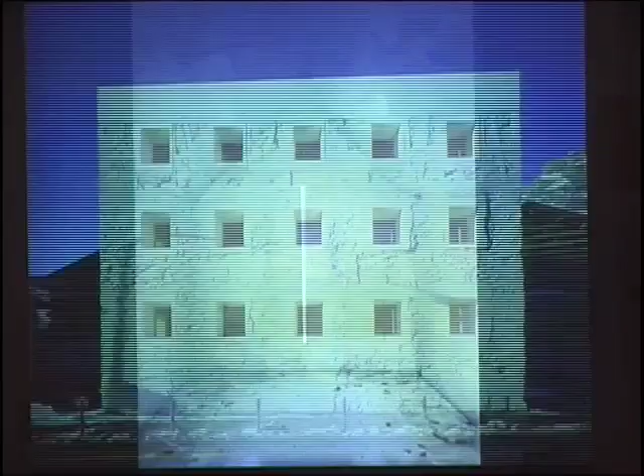The yellow house, even if it's white, it's called the yellow house, from Valerio Olgiati, built or renovated in 1999. Since the internal structure of the dwelling house was not suitable for a new purpose as an exhibition space, the architect had to take rigorous action to convert it.

The building was completely gutted. The entire interior was rebuilt in solid wood. The old external plasterwork was removed to reveal the natural stone walls. The roof was removed and replaced with randomly shaped stone slabs. Finally, everything was painted white to conceal anything left unfinished. The radical way to turn an old building into a new house with a completely new appearance is impressive.

Standardized building for railway technology from Morger and Degelo Architects. Within five years, from 1996 to 2001, the Swiss Railways replaced obsolete railway control centers with standardized and modular buildings. Hollow concrete elements for walls and ceiling are filled with excavation from the site, working as a buffer in hot and cold seasons. We think finding an archaic solution to protect high-tech equipment is desirable.

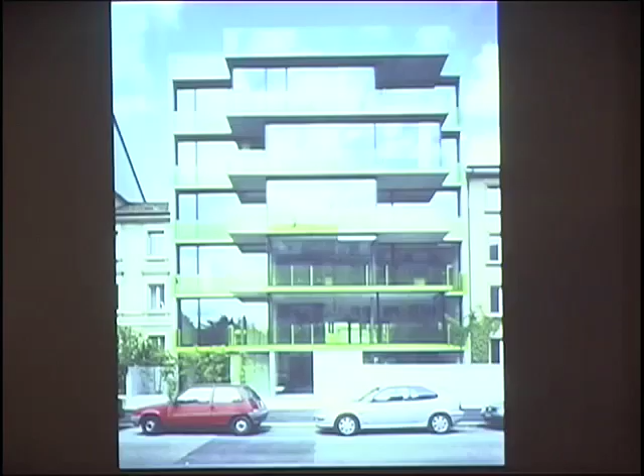Project number 10, Loft House from Buchner-Bründler Architects, completed in 2001. The Loft House in Basel contains five generous one-space apartments. A compact core with stairs, elevator and bathrooms is positioned in the center of the building and creates zones with different atmospheres. The facades are fully glazed to the front and to the back. The cantilever front facade allows a view along the street and gives the impression of living above it.

Now, a bit more freely, starting with our own projects, you might see the influence of these ten formerly mentioned young offices.

One of our first projects in our office was the refurbishment of two apartments in Davos. Davos is a place in the Swiss mountains. It looks at this time of the year like that. It's not a village anymore, it's really a town. Many people live there, and it's mainly a winter destination for ski tourism.

We have been asked by the client to design an interior for a flat that he bought in a bare brick situation. That means the house was not completed when he bought it. The interior was not designed at that point, and he asked us, what can I do with that? It was clear from the beginning that he would not live there, but he thought this is a very special room. It has a room height of 4.50 meters, which is exceptional for a living space. So he saw that, thought he had to buy it and do something, and asked us what he could do.

Going back to the floor plan, we proposed to do an apartment with one big room. It's designed as a vacation flat. We divided the whole floor plan into three strips. You can see on the right side the main room - living, dining, kitchen, all together in one space. The second strip has the entrance area on top, wet area in the middle, sleeping room on the bottom, and a third strip that was originally only used as storage space, which we changed into a kind of wellness area.

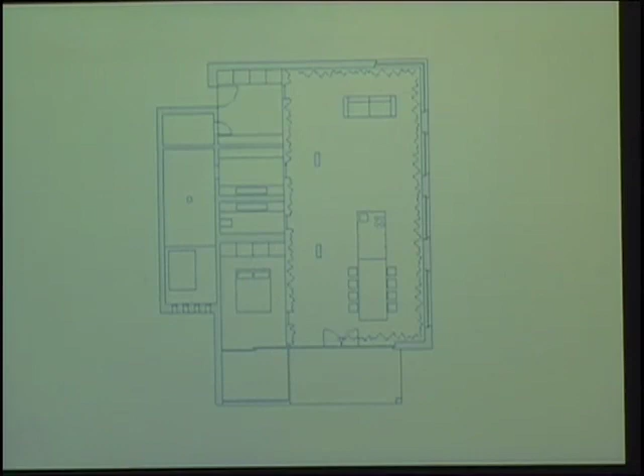This part of the flat is already underground because it's on the slope, so there is not a lot of light here and on this part. We had to bring in the light from the windows on that side into this area without covering it with this wall. So this wall was one part of the project that we took a lot of effort on, to create an element that is self-standing, translucent, but also a room divider.

The result of that research we did, this development, was a wall formed out of two wave lines, one in a horizontal direction and one in a vertical direction. The two wave lines cut each other - there's an intersection of the two wavelines - and when you take a material cutting along these wavelines, you get a wall that has holes in it. Of course, we couldn't make holes in that wall, so we covered the holes again with the translucent material.

There have been many tries and many prototypes we developed. Finally we found a material called reinforced plastic. I'm not sure of the term in French, but I hope you can see from the image what it is. It was the only material able to achieve such a shape while keeping the translucency and the stability for the wall. This is a detailed view from the back of the wall, and this is the full view. This wall is self-standing - it's just fixed on top so it doesn't fall, but it stands alone on the ground.

In the same building, we have been asked by another owner of an apartment to do the same work for his apartment. The first one was on the ground floor, no nice view. The second one was the opposite—it's the penthouse on the top of the same building, 5 stories upper than the other one.

And this was a Russian family that came to Davos for ski holidays, and for many years they always stayed in a hotel and decided that they want to have their own apartment, but they will use it only as a vacation home.

The original design of that floor had 2 apartments—one apartment on that side, the other apartment here. They decided to buy both apartments on the top level because they worried about the space for their sauna. So because they bought both, they have really a lot of space. It's a couple with an adult son, so it's for 3 persons and guests.

As a difference to the other apartment downstairs, this floor plan here is really based on single rooms. It's not like one big connected area—each function is in a separate room. This was clear after discussion with the client. They didn't want to have open space or something like that.

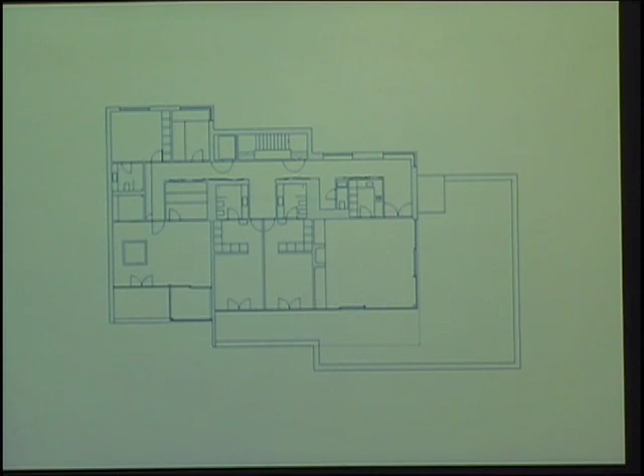There is one space that connects all these different small rooms—this long corridor connecting each room. And because of this heavy materialization, we thought we have to do a space that kind of clears or washes or takes these materializations away when you change from one room to the other room, and keep this corridor space as neutral as possible.

So we decided to make it only in white, with white walls, white ceiling, white floor, using different brightness of the materials. So every time you change the room, you have to go through this white corridor.

So this is a picture of a model we did for presentation to the client, and we really tried to build it one-to-one from that model.

Of course, keep on working with the brightness of the materials—we have this shiny wall on the left side, and we have this three-dimensional structure on the right side that we tried to work with the light that only comes in at the end of the corridor. So you always have the light facing you at the end, and if you do a wall which has just a little shifted surfaces, you get different shades of white.

So this is in the direction to the valley. This is the same corridor in the other direction.

It was not possible to have a window there because we needed space for another room behind it. But it was possible to have a skylight because we're on the top floor of that building. So after the roof was done, we cut an opening to bring in light on the other end of the corridor.

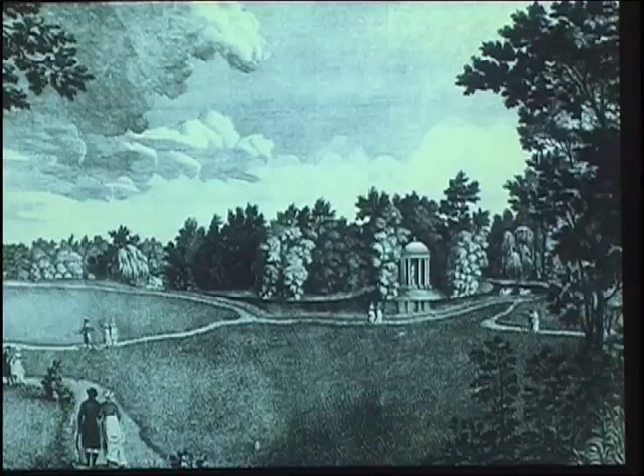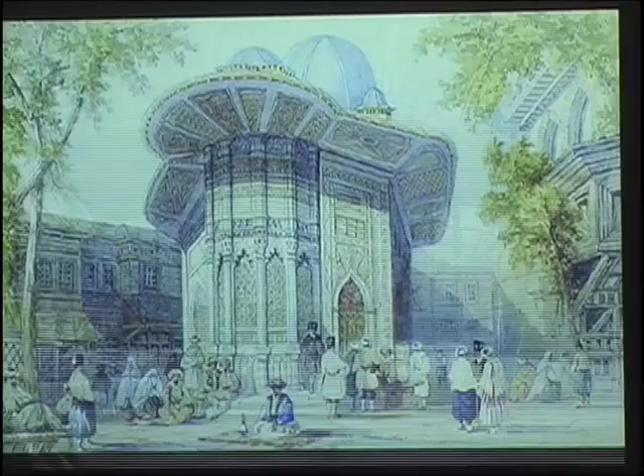We ended up with a sketch that fits all our imaginations of what this pavilion should look like. So we closed this process of analyzing and research with this one single sketch. All the ideas, feelings, and atmosphere were in this hand drawing.

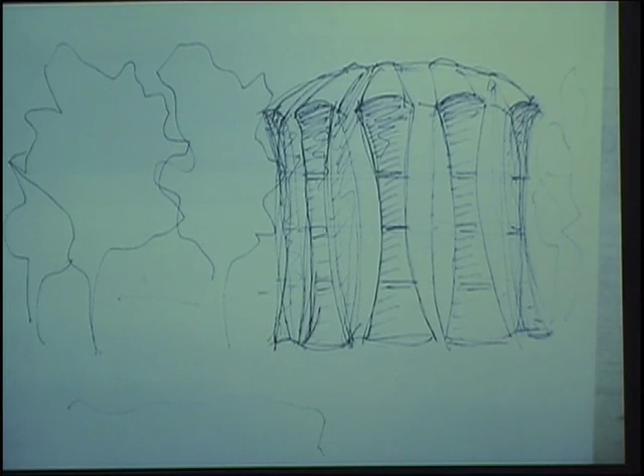So we developed the floor plan from that sketch. So you can see the park.

Here is the Rhine, here is the old town wall with the gate, and this area was used as an industrial butcher area. This is the old villa of the Le Patron, which was the only element that was kept, and everything else was torn down and made into a park.

Here in the corner there's a little forest, with more trees than the other part of the park. And in the middle of that forest, we wanted to put this round pavilion.

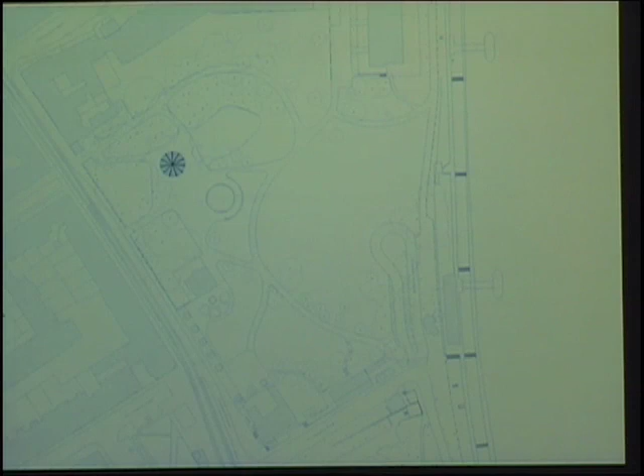The program didn't really fit into that sketch that we did, but we also had the possibility to use the basement for uses. We put the kids' playing area in the basement.

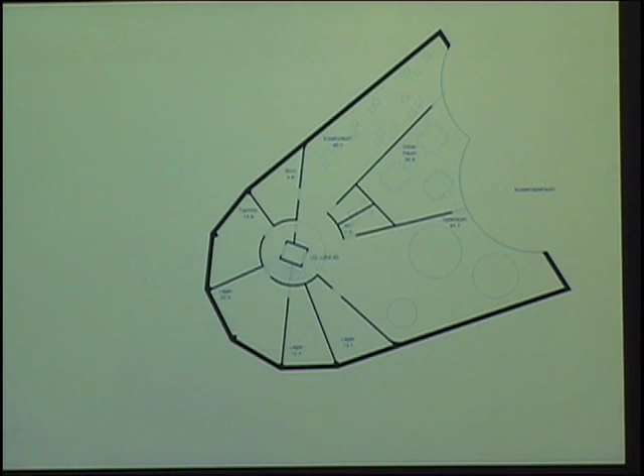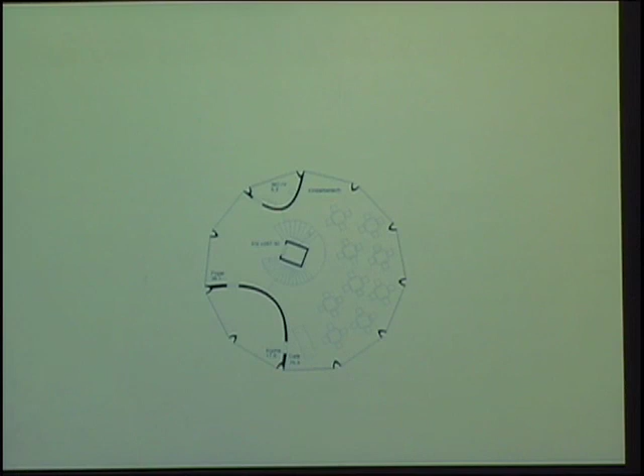There's a courtyard situation on this side, so they have direct access to the outside playing area. The parents are on the ground floor in the cafe, and there is a middle floor for administrational and infrastructure uses.

And on the top floor, under this cupola of the pavilion, we placed a multifunction hall that can be used for different purposes.

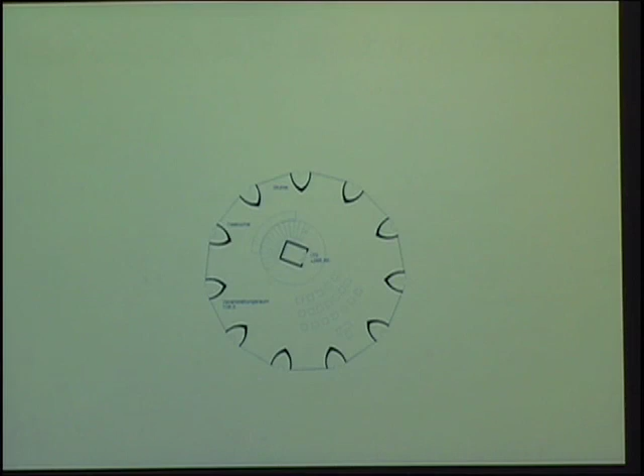So, top floor. It's a bit slow, okay. In the section you can see we did these two main spaces.

One on the ground floor, this public cafe for the neighborhood, and on top floor the multifunction hall, with a belt in the middle we used for the lower floor infrastructure and administrational uses, and then put the play area downstairs. Here is outdoor space, so they have direct access.

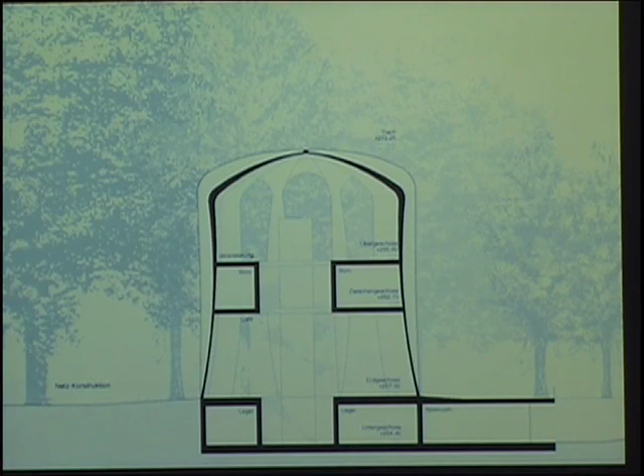In the facade, we're now coming back close to the sketch, really trying to keep this impression of this pavilion, even if it's a 3-story high building.

We haven't been successful with this competition, but from my point of view, it was the only project that really did a pavilion. All the other projects became big houses that are oversized for that area.

But the jury had a different point of view than we had. So it's a project I like to show because we love it very much, but they got something else.

Okay, another project that's going to be realized. We just started construction last December. It started with a small invited competition.

The client is a private client. There are 2 sisters who have a ground that belongs to the family. They wanted to do an apartment building and decided to do a competition for young Basel offices.

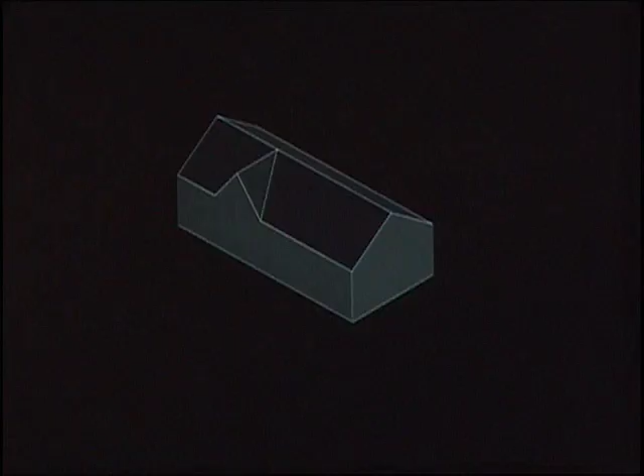So they invited 3 young offices, and one of them was our office, and we were the youngest of the 3. The other two had been more experienced and already known in Basel. And we felt that this was a disadvantage for us.

So the others could prove they can build, they have an office size that is no problem to realize such a project. So we had to find a way to do a project that could convince the client.

The plot is a little bit outside of the town, in an area where single family or double family houses are standing. And the construction regulations in that area are very strict.

They have really strict regulations that it's not allowed to do a flat roof, you have to do a slanted roof. They described it in the building codes because they had to translate the image the government has of the houses that should be built in that area.

So that was the image they had, and we expected that the other offices would do a project that doesn't follow the regulation, because it was written twice in the code that exceptional permissions are possible.

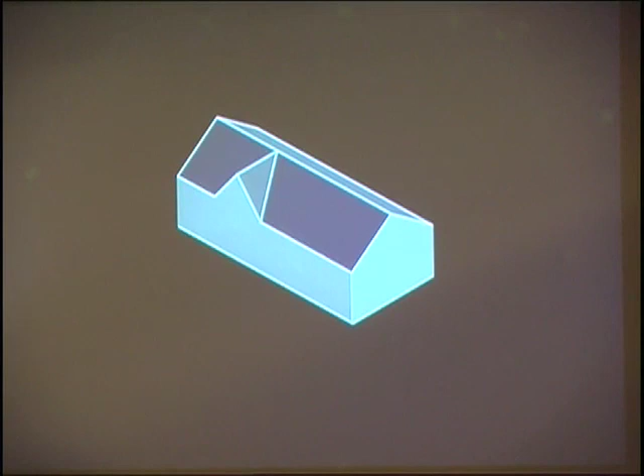So we expected that the other competitors would do a flat roof and use it as a roof terrace. That would be a big advantage for the floor plans and the housing situation there, because the spot is next to a park, so it's a really nice view and location.

We started working with the codes and read them very carefully. And the code has gaps, elements that are not really precisely described, but they didn't know.

So we really followed the code, and it says this is the maximum dimension that we can do. We did it because the clients wanted to have profit from that project.

You have to have this slanted roof starting from the longer side of the volume, and you have a maximum degree that you can do. This was 45 degrees. So you have a level height that is given, you have a total height that is given, you have a width that is given. It's geometry. So you end up with such a shape that follows 100% the regulation, but starts looking different at what they want.

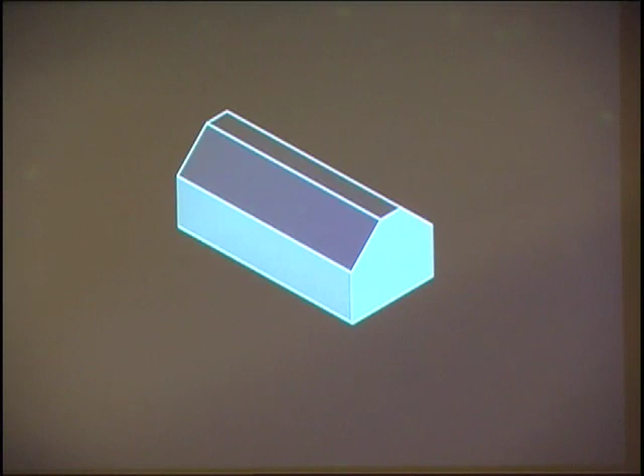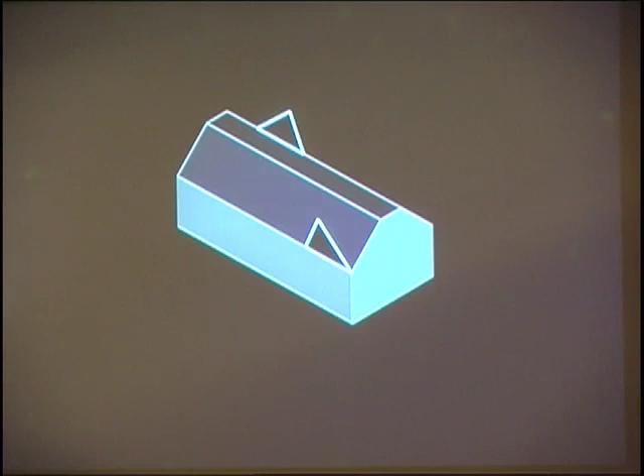So you can do things like windows or surfaces in the roof, and this is described by a formula: the length of the facade multiplied by 60 centimeters equals square meters that you can do like standing surfaces in the roof area. But there was no description of how you connect this surface with the main roof.

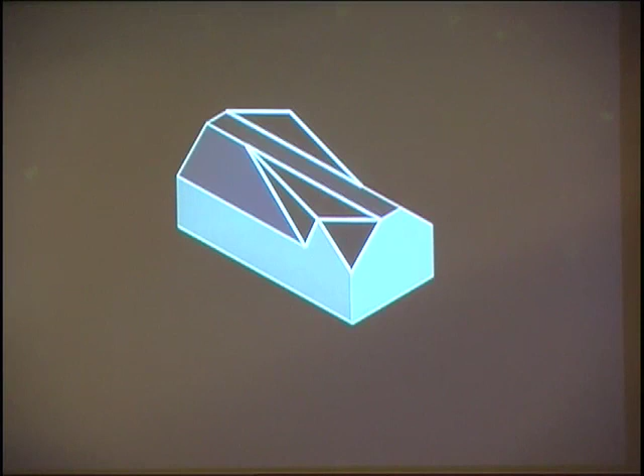So we ended up with a shape that is bigger, and actually it's a bigger volume with the same amount of square meters, but you can use the square meters better, especially on the top floor under the roof, because we did this shape. The result of this analysis was that we could fit 6 flats instead of 5 flats into that building. And this is an economical advantage that we could figure out just based on the building codes.

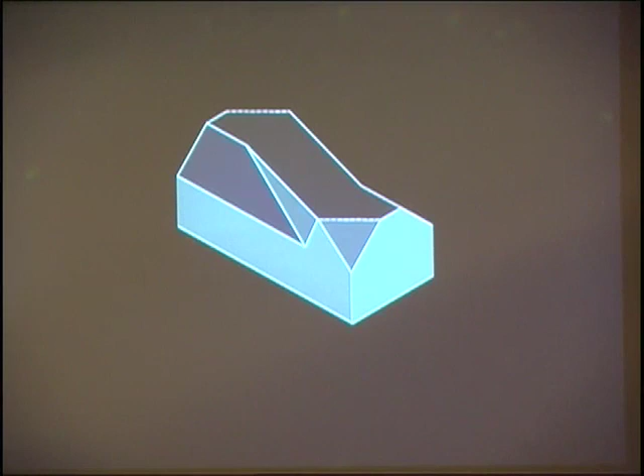The overview, how we developed this shape of the building. It looks easy, but it was of course not so easy, because we really tried every kind of roof shape that follows or doesn't follow in every point that regulation. And we tried to do the maximum that they can get as living space.

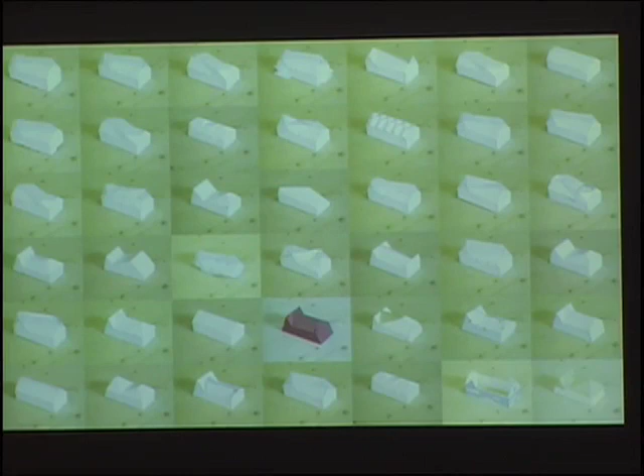And we won this competition against 2 other offices. One reason was really this efficiency that we could bring into that project.

This was the image we did for the competition. It was covered with copper. We have 2 main floors that are mirrored, or they have a point symmetry in it, and we have the top floor that is the 2 flats under the roof.

Also, according to the regulation, it's allowed to have the entrance not in the ground floor, in the basement. So we don't need space in the ground floor. We can use the space in the ground floor for the apartments. So you enter the building, underneath you go to the center of the house. You have staircase and elevator there, and you get up in the core of the house and enter your flat.

So this is the standard floor plan. You can see this is like a rotation. It's twice the same floor plan.

We decided to do a main room in every flat. So this is like the main living room that is in the opposite direction, so you're as far away from your neighbor as possible.

On the upper floor, we place these main rooms in the other direction, so each neighbor is as far away from the other as possible and still live together in one building. And as you can see in this floor plan, there is an exception because they wanted to have different sizes of apartments.

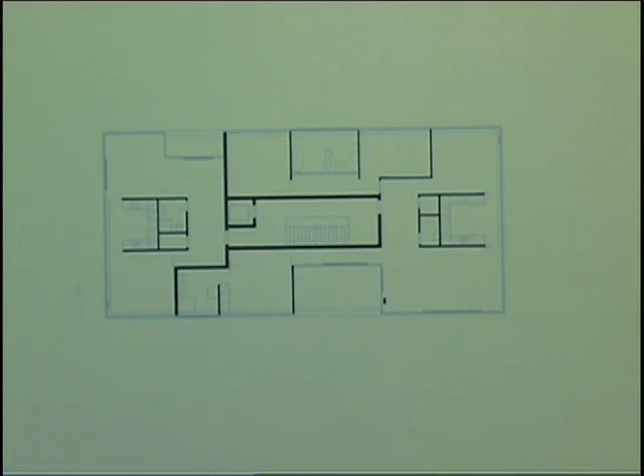In the top floor under the roof, we decided to separate the space, not as we first had in this direction, we separated in this direction, so you can realize the full length of the building in one big space. You have the main living area, kitchen in between, and then you have a sleeping area with a revolving door that can separate the main space from the bedroom.

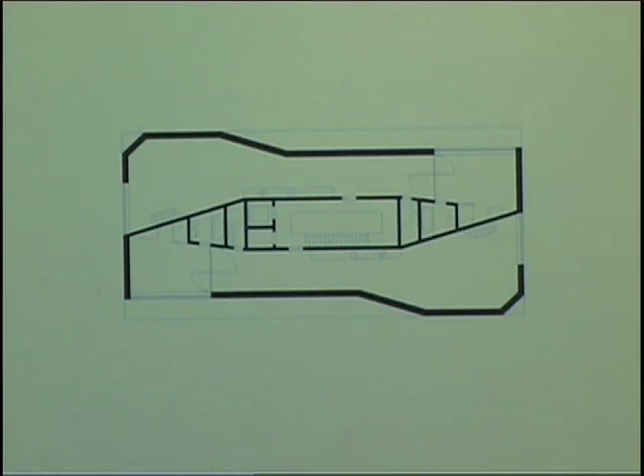Another big advantage with the shape of this building is that we get a flat part on the top. So the exterior space of these two rooms, two flats under the roof, is on top of the building. So we have a flat roof on top, we have a roof terrace, and we don't need an exceptional permission for that building because it's according to the codes.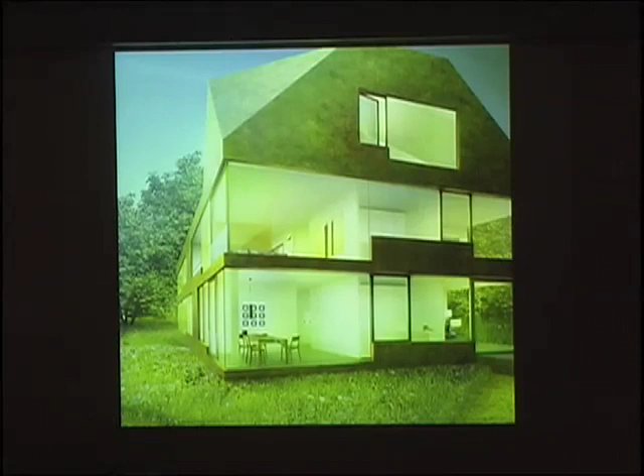This is another image we did for the competition. The project changed a lot. We had a lot of cost pressure, and we had to do it much more efficiently, but we still can keep the main ideas of the floor plan and of the shape of the building, but the color and the materialization changed many times since then.

The last project I will show you is our first international project.

It's called the Ordos 100 project in Inner Mongolia, China. This project has a story that maybe you've heard about before. This person is Ai Weiwei, maybe the most famous Chinese artist. He was involved from the client side to do that Ordos 100 project. The goal was to build 100 villas in a new city in Inner Mongolia. They made a list of 100 young international offices, and somehow our office ended up on that list. It's very international—there are no Chinese offices, but they're coming from all over the world.

So Inner Mongolia is a part of China between Mongolia and China. It's this part. We really can't tell you a lot about that. We got this invitation to go there one month later. We went there to have a look at the site. They're very proud of Genghis Khan coming from that area.

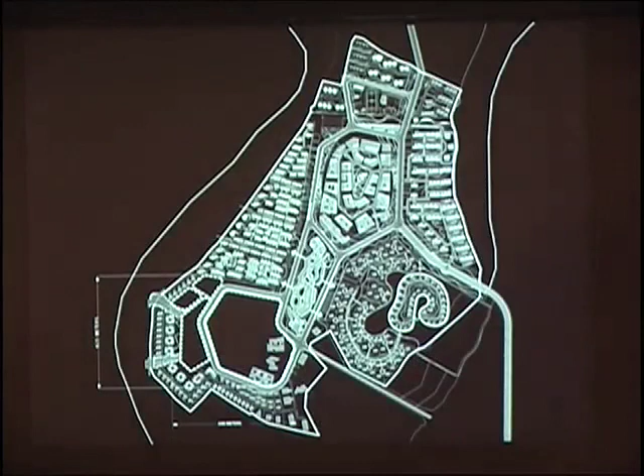In one of the suburb areas of that new city, there is the Ordos 100 project, placed in an area called 'creative industries.' I still don't know exactly what they mean by it, but it sounds very good. There will be an architecture school at that spot, I heard. There's already a museum here that's completed, and ateliers for artists built by EBV.

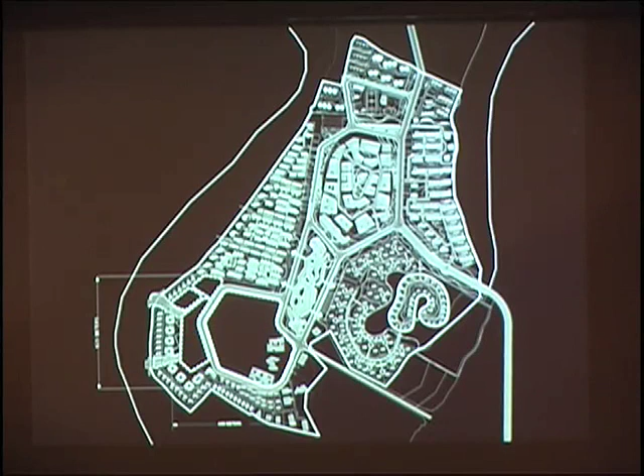This spot here, it was planned to do these 100 villas. The office of EBV did a master plan—actually they did just 100 parcels. When we went there, there was a lottery, and every office got a number with a parcel. We got number 21, which doesn't matter so much because it looks the same as 20 and 22, and it looked like that when we were there. So somewhere here is our spot.

So how can you do a villa when there is no surrounding? On what will you react? There is no town, so we had to find different ways to design a villa. This is the client—we heard he became rich from milk products that are very popular in China right now.

We all got the same program for that villa. It's about 1,000 square meters. What kind of program do you have in a villa of 1,000 square meters for an owner you don't know, because the villas will be sold? Somebody will buy that villa, so you can't react to the client—we are usually used to having this interaction with the client. We just had this program, this Chinese and English translation, that was more or less a main living room, or the small living room, and main dining room, and small dining room, and main bedroom, and some additional bedroom.

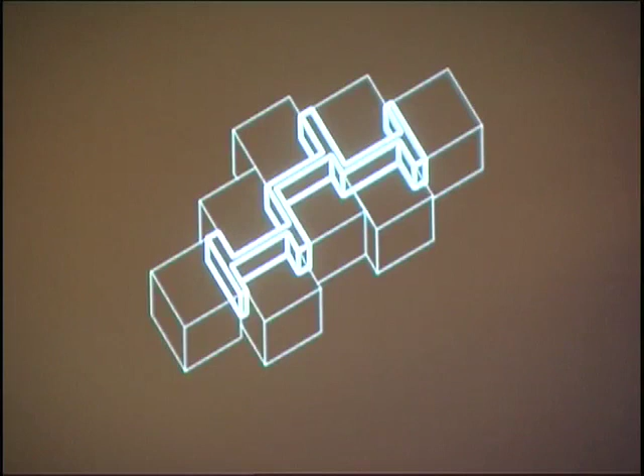Because it's not really comfortable to have a bed in a 250 square meter room, you get lost. So within that big area, you need spots, different atmospheres, different feelings, light situations, so when you enter the room you know where you want to place your bed, you feel cozy at that spot, but with no dividing walls.

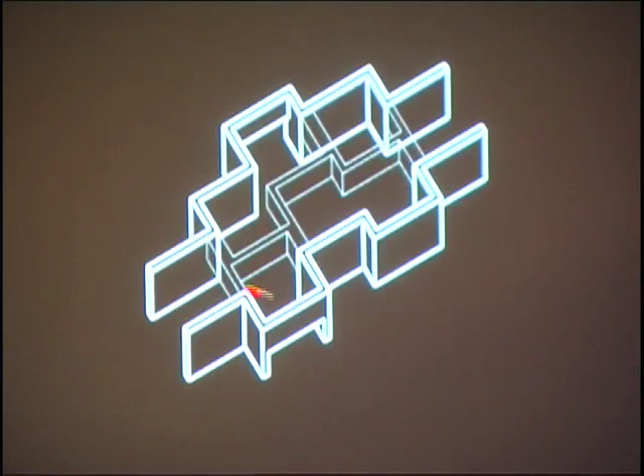So we try to use a kind of cupola shape above your head. You have 2.50 meters of free space in height within the 250 square meters, and above that you have this beam that is the in-between space of these cubes, creating spots or points in this big surface.

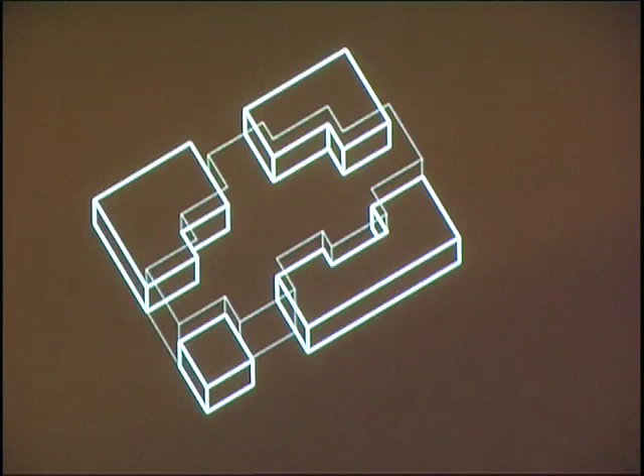The uses are for both the non-master people and the master. The other people have their bedrooms on the ground floor, in a ring shape. In the middle there is the pool that was required in the program.

The pool is not only for wellness, it also works to bring humidity into the building, because the climate in that area is very dry. So you need this pool for climate control in the building.

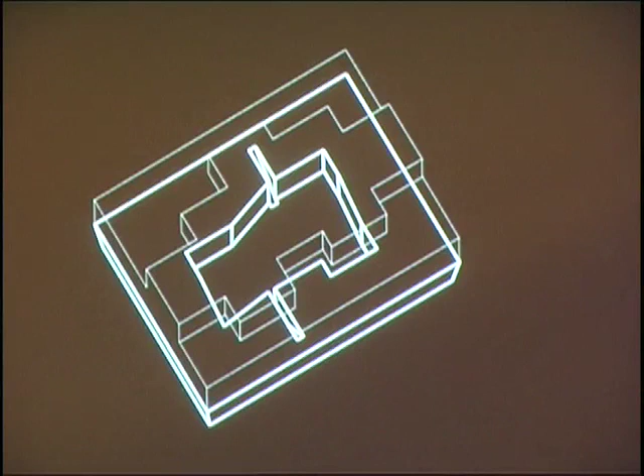So the people living downstairs have two stairs, two direct connections to upstairs, ending up at the edge of this double-use area. So if they wish, they can use the upper floor without crossing the room of the master. So there's kind of a shadow life of people living downstairs and using the house at the same time as the master, but if they don't want, they don't see each other. If they want, they can see each other.

So, putting everything together: the master gets double room height, the other gets single room height. So also from the outside, you can see where the area of the master is.

Going back to that explanation about finding spots or creating different atmospheres, different places in a bigger room - this beam on top of half of the volume creates a kind of mirrored room on top. So you have a division, but not on the floor, but in the ceiling.

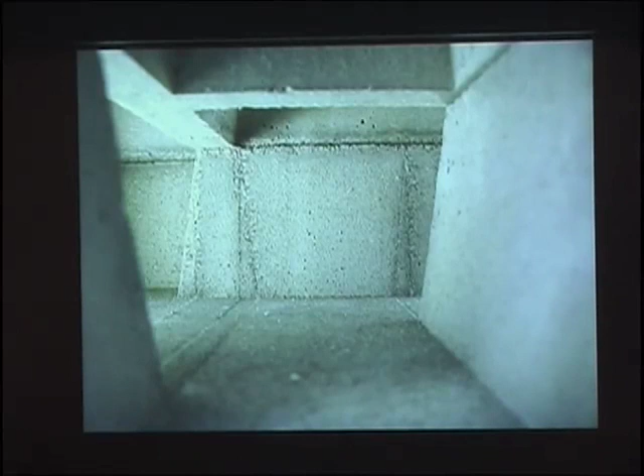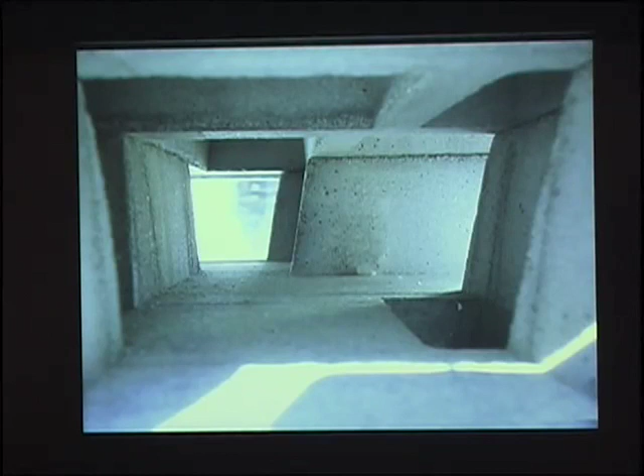And we tried that with different models, different shapes, like the walls bended a little bit, and it wasn't finalized yet - we were figuring out how to bring the light in, and really developed it with different models and different dimensions so that it would work in the model, and we hope it will also work in one-to-one scale.

This is just a simple try to make a living area from a model in that dimension.

So now it's getting more precise, coming closer to the design I showed. These are the situations we tried to find.

So finally, this is the final design. We ended up with this shape. As you can see, one floor or one big surface on the floor, with different volumes above your head.

So we tried to bring this conceptual sketch also very clearly into the floor plan. This is a floor plan of the space that is above you, so there's no floor, that's just the void.

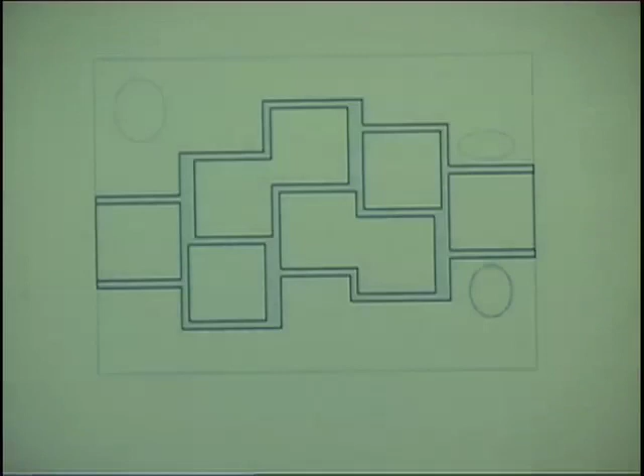Getting to the first floor, where you can see the master room living in between these four corners. Here are the connections downstairs where the other people have the connection to the first floor. This is the main entrance where the master can come in and is guided directly to his private floor.

And they had some requests in the program - for example, a wine cellar. I don't know if they're going to use it, but next to the Western-style kitchen, we made access to the wine cellar.

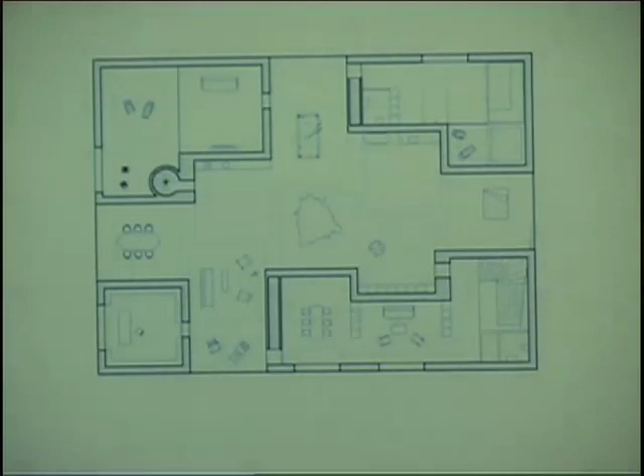So if you go one floor down to the ground floor, you have parking, entrance, main stair going up to the master, and all the other people enter here. The pool area is kind of a corridor, so it's double function. We didn't do an additional corridor, so you walk along the pool, and all the rooms are connected from this pool space. They have employees on this side, some additional bedrooms on that side, and a Chinese style kitchen on that floor.

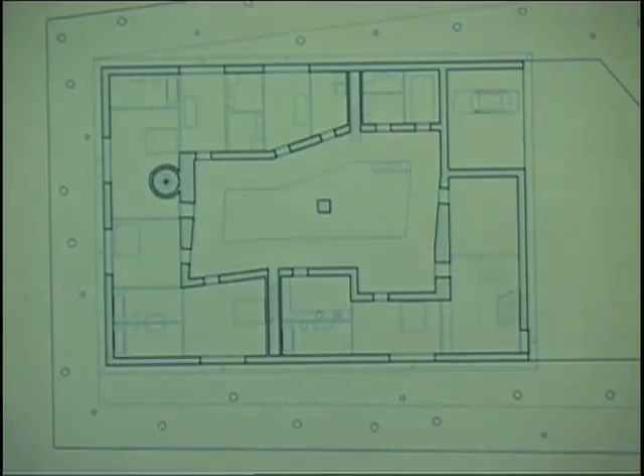And if you go down one more, you have the wine cellar. This is only a connection that goes directly to the master room. There's no access from the ground floor, so only the master can use that space. You can see it better in the section. It's really separated. Access is here next to the kitchen, going down with a spiral stairs directly into the wine cellar.

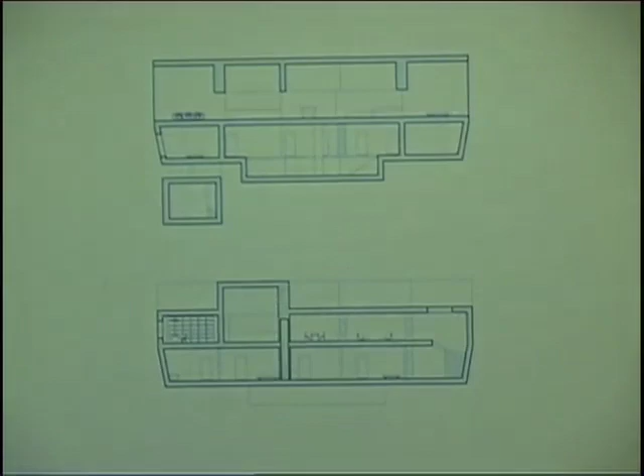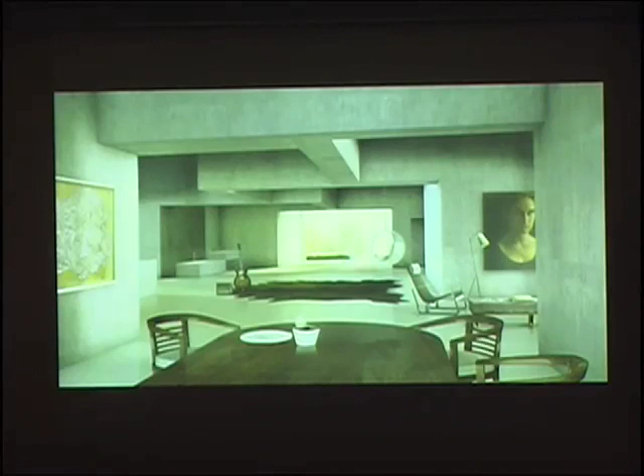So this is how we imagine it could look like if they follow our drawings. I would like to stop with this image. I really look forward to seeing the project built, going there next time. And we know it will look different, but we don't know how different it will look. So thank you for your attention, and I wish you good studies for this semester.

So if there are any questions. Otherwise, we go for a beer.